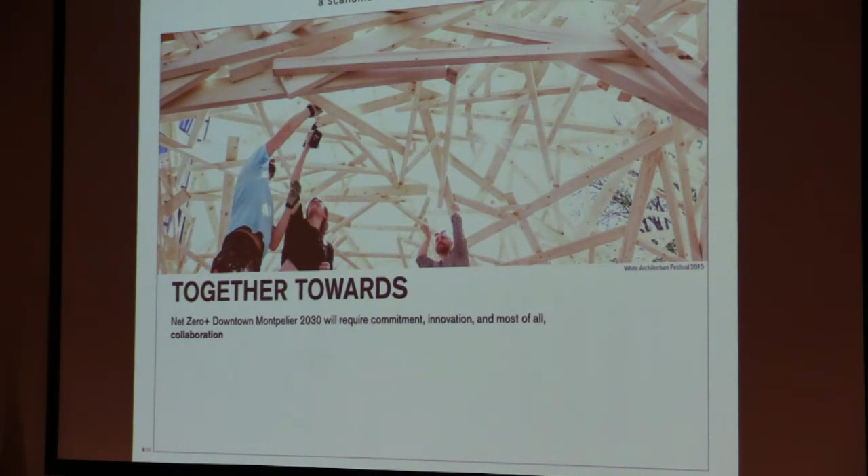Next slide. Creating a healthy city that ensures human well-being requires commitment, innovation, and most of all collaboration. We would like to collaborate with you, to guide the community to success. Therefore we offer a strategy, not necessarily a design. So you should read our proposal today as an architectural illustration of the possibilities and opportunities, meant to invite and inspire you to participate in the design process.

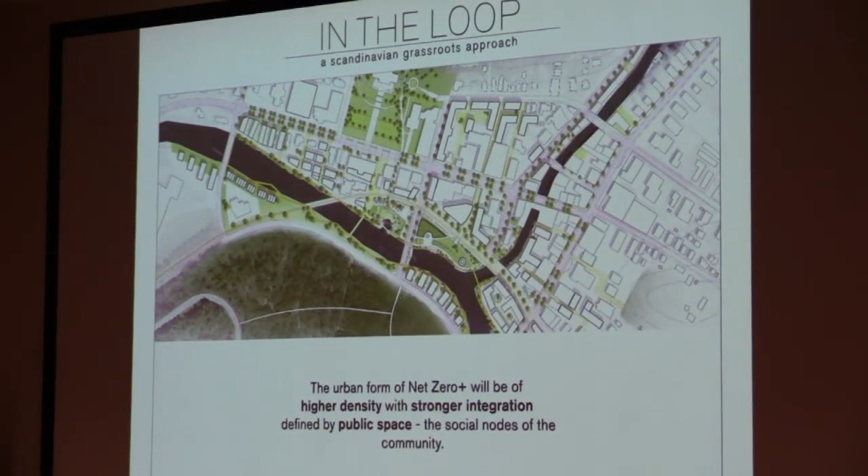Next slide. A net zero or net zero plus urban environment requires higher density with stronger integration of elements. Our proposal is a toolbox, full of smart, innovative, and doable design solutions applicable across all borders—solutions that will ensure a healthy city. The new development is nested in harmony with the existing Montpelier, enhancing the existing community, and is a celebration and addition to a wonderful city, offering new developments that will attract the young.

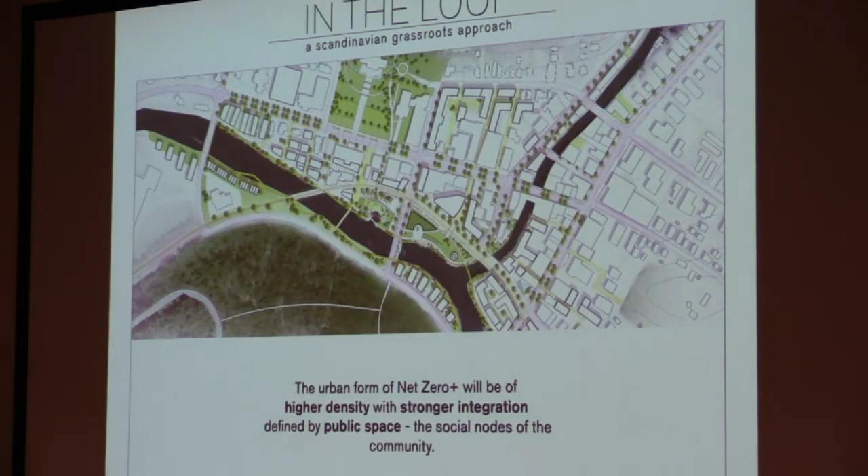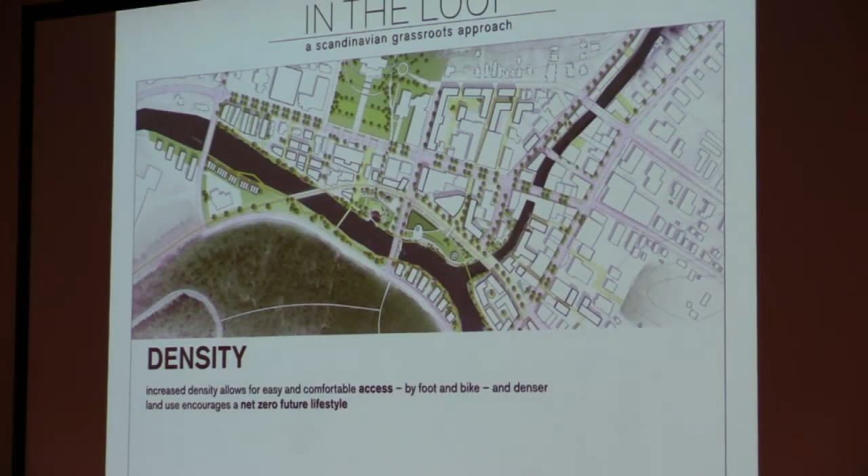Next slide, number 6. An increased density is essential for a net zero urban environment. It makes for close proximity, which allows for more sustainable transportation, more sustainable operations, more sustainable energy use, but also a more sustainable lifestyle—because keep in mind a sustainable future is not only about energy saving.

Next slide. A higher density, together with strong integration of functions and program, creates a healthy city. Our proposal includes a series of doable, innovative design solutions that are adaptive or adaptable to future changes, aiming to empower people to take a lead role in everyday life. Next slide, number 8.

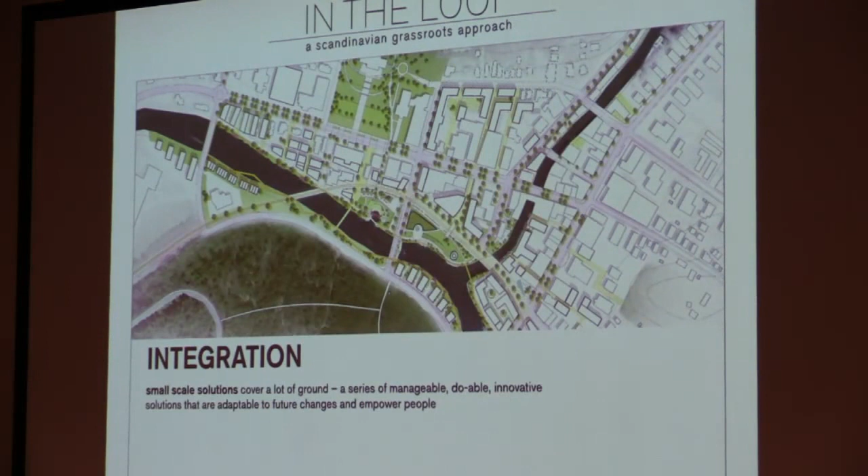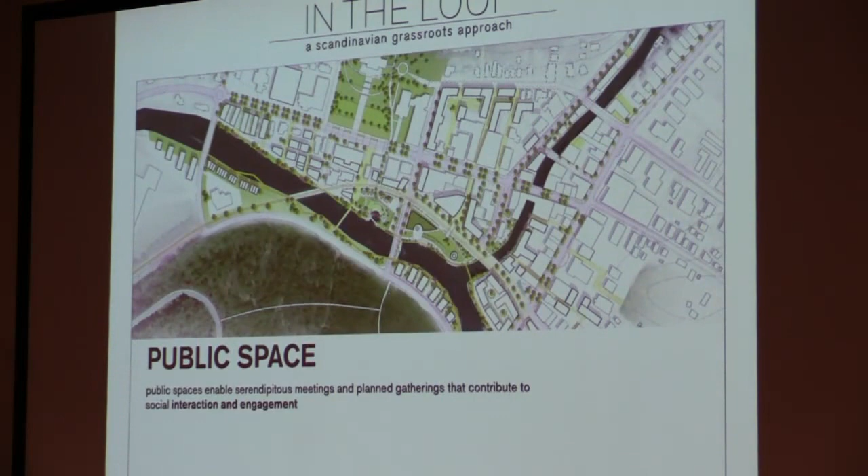Public space is the backbone of a healthy city, and we offer a wide variety of public space for the diversity that is the community, to contribute to social interaction and engagement, once again to ensure the community's well-being. Public space is a grand democratic gesture that empowers residents with pride, ownership, and accountability. Next slide.

At the center of the proposal is the new Winooski River Park, which is an essential public space in design that offers a dynamic program reconnecting Montpelier to the river. Winooski Park is an assemblage of park rooms that engage both the city fabric and the river. It's a green anchor, a welcoming entry, and the breathing room for the city development.

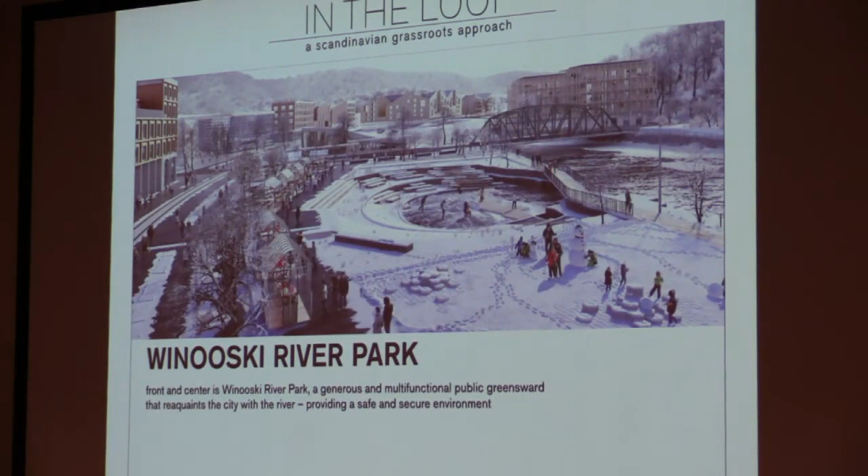In the middle of Winooski River Park, we envision as one of the first steps in the development the new Net Zero Plus Lab, which is a place where people gather, a space for education and engagement, and it focuses once again on the youth to take part in shaping the future of Montpelier.

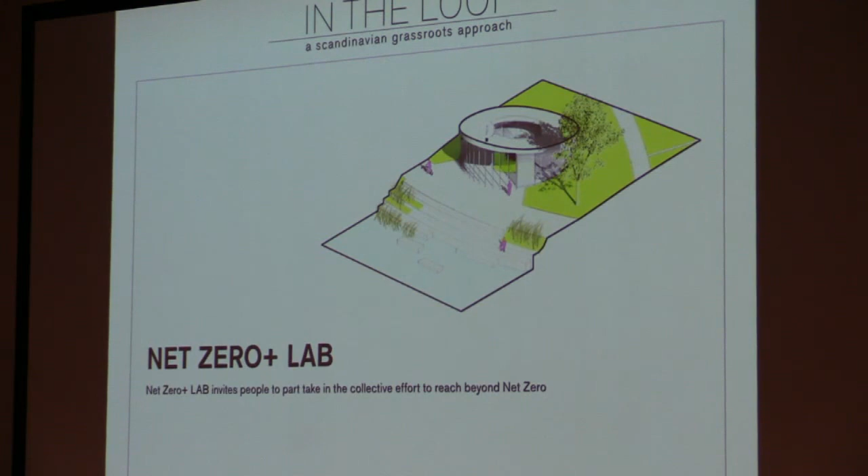And it can play a strong role in stormwater mitigation, because a net zero city requires that we double-purpose every civic infrastructure. An analysis of soil contamination is required to inform the design of this.

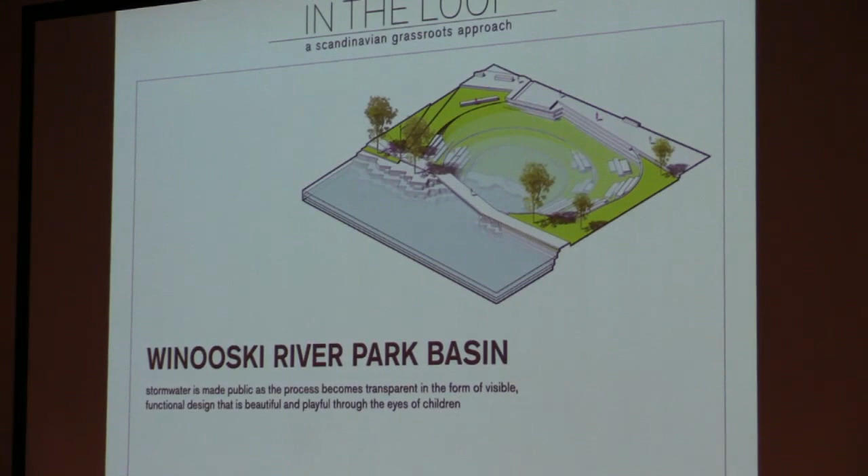Stormwater mitigation measures are very important for every city located along the river, now and even more so in the future. What we do is integrate it in the public space, where we can collect, filter, detain, and infiltrate stormwater while also celebrating water and public life.

This playfulness is celebrated in both large and small gestures throughout the city, on the street, in parks, and in the interface between public and private.

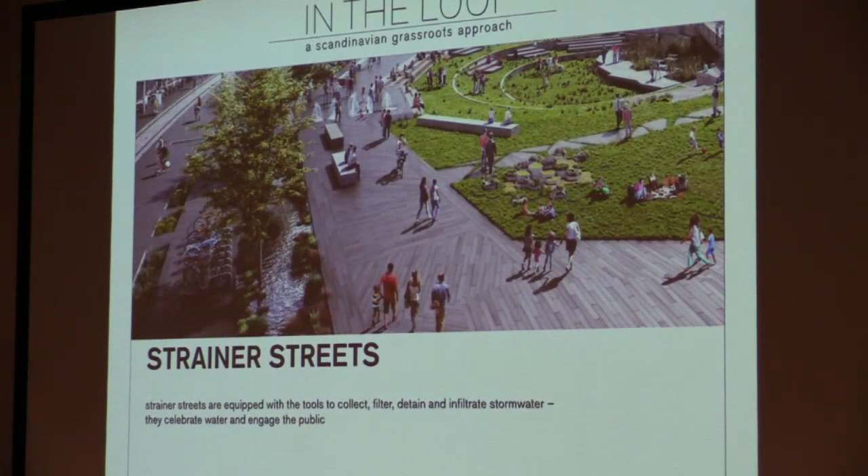A variety of public functions, such as the transit hub, will bring life to the park, ensuring an attractive and safe urban environment.

Certain transit hub activities can be placed on the streets. They don't need to be in indoor climate within the building. They can be on the streets, and they should focus on the transformation from car traffic to other means of transportation, such as bicycle rental, car share stations, and local electrical bus lines. By doing so, this activates Taylor Street and the civic landscape.

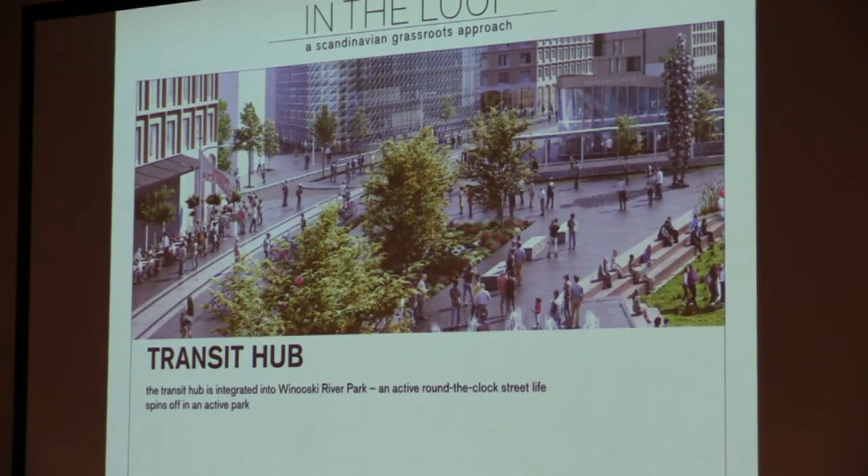The new development exists in harmony with the existing buildings of Montpelier. It's not meant to replace the other buildings, but it will have an integrity and character of its own. It's not a replica of decades past.

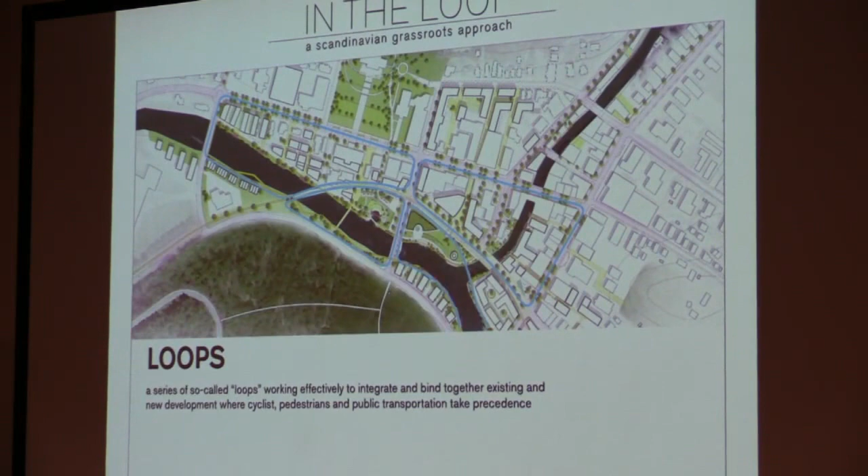A series of loops integrate the new development seamlessly and ensures easy accessibility for cyclists and pedestrians. These loops are easily expanded to serve additional neighborhoods to the east, west, north, and south.

In one of these loops, from the east to Winooski River Park south, the park extends very naturally on something we call the new Park Bridge, creating the new entrance to the city.

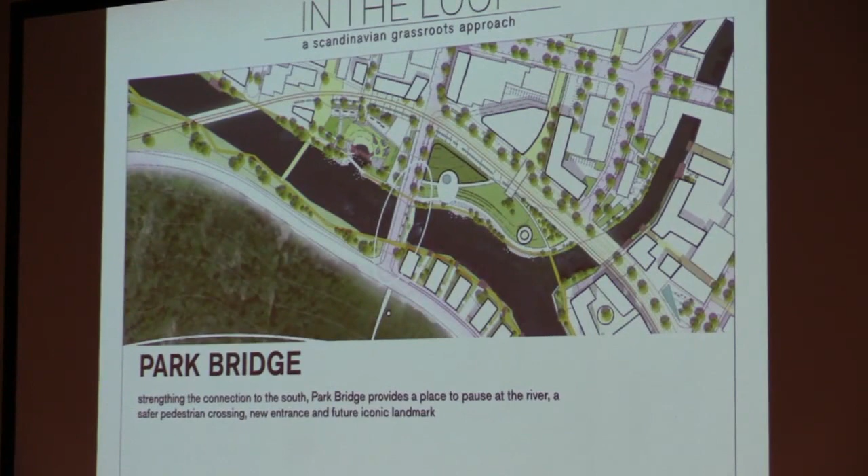This will transform the existing bridge to become a new icon for Montpelier and create an iconic entrance to the city and the transit center located in the city center.

The architecture: we aim to include the community to formulate the architecture of Montpelier and beyond.

The new development offers alternate and flexible typologies, providing opportunities for all, such as cooperative housing, low-income and market rate rentals, private residential, and commercial functions.

We envision that the architecture is constructed from locally sourced, sustainable, and recyclable materials where possible.

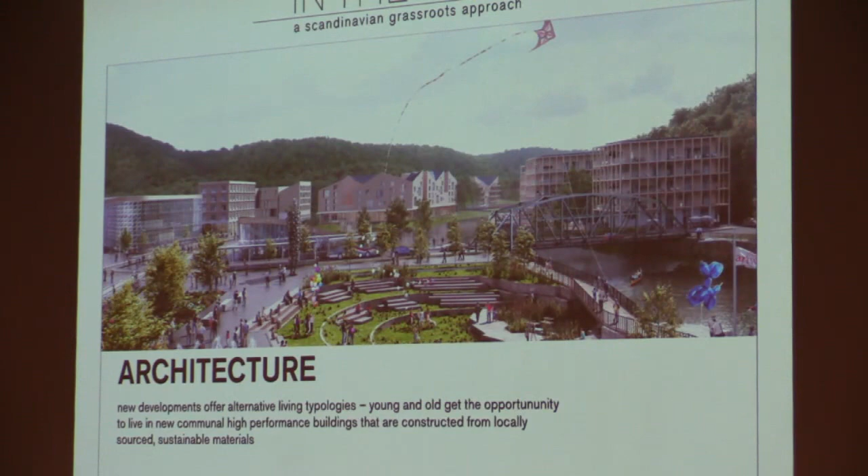A first step towards this future could be a hybrid parking garage on Main Street to make the existing parking space available for development.

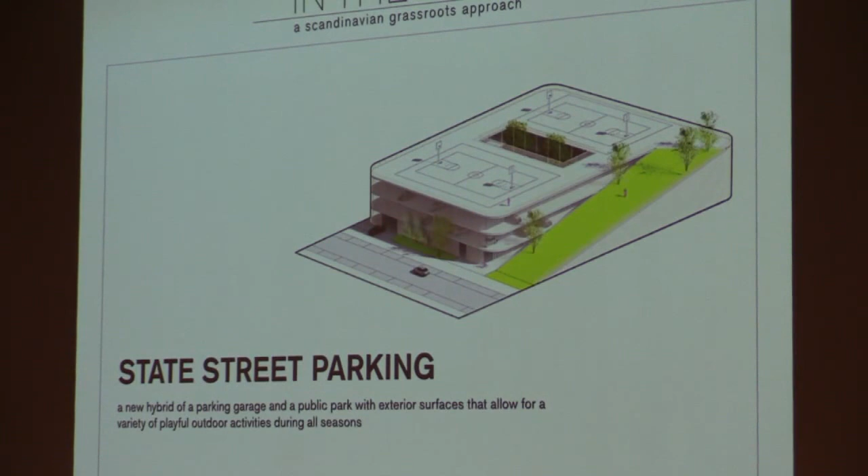The parking garage will include programs to activate the building, such as outdoor leisure on the roof. It can also include a mobility hub to transform once again from car traffic to more sustainable transportation measures. It can include a community center, and eventually housing could be included in the same structure.

Makerspace living is a new typology. It provides opportunities for young starters, both in starting their business and also in finding a new home. And it's adaptive to market demands.

It is built up of a rational structure with prefabricated elements that can transform a floor either into dwelling or makerspace spaces. It blends rental units, home ownership units, and mixed-use units.

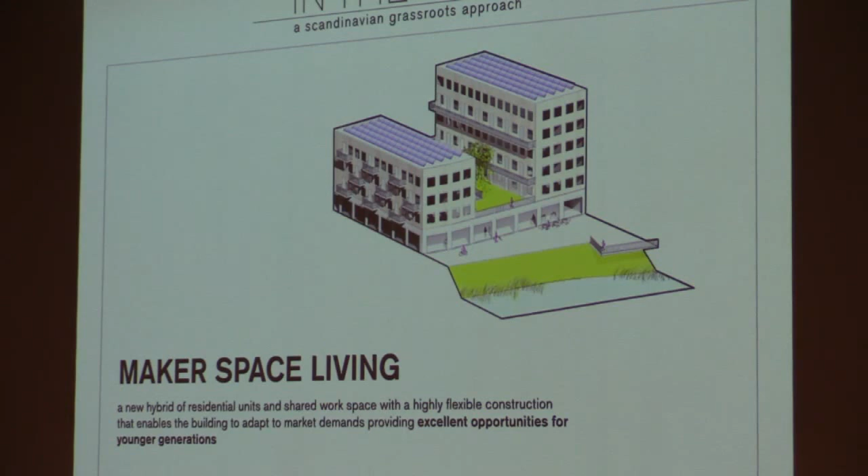The new indoor farmers market is inspired by the existing farmer market culture in Montpelier, and it aims to connect from farm to fork.

The farmer market links to the included functions, which are elderly housing and daycare, through educational purposes and daily activity. It is bridging generations.

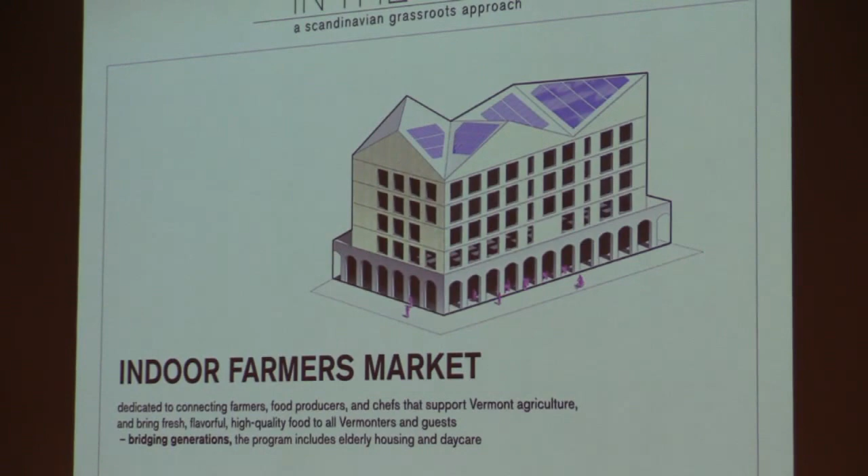And it is providing for hands-on learning to build an understanding of nature and its importance for a net zero plus future. It allows for locally produced food production to supply the culinary industry.

Once again, another loop in our proposal.

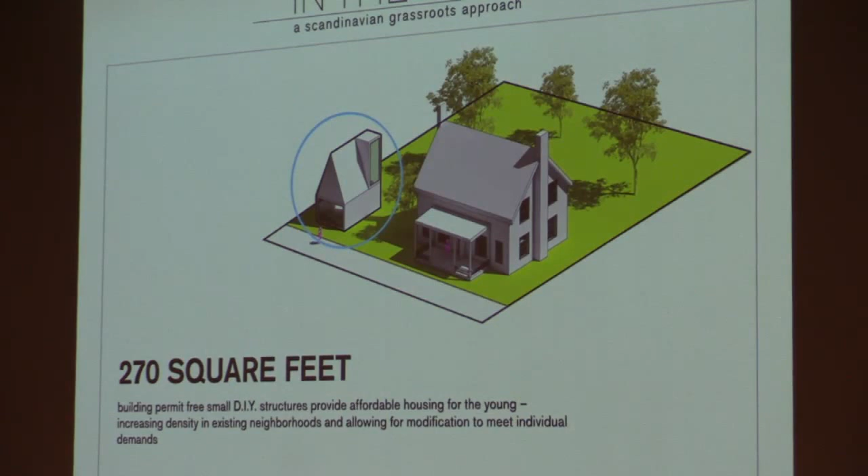We suggest the city allow for the construction of structures less than 270 square feet, similar to the model we have here in Stockholm, without a building permit. This provides even more affordable opportunities for home ownership for young people. I have to add that this is not required to achieve the required density downtown, but it will densify areas further away from downtown, and most of all, provide opportunities for the young.

On the south side of the river, we envision a series of housing units called river housing. The development of the south bank is essential to connect downtown to the insurance company in combination with the new bridge park. Being close to the river, the buildings will have a concrete plinth supporting and protecting from possible flooding, with a timber construction on top for the upper floors.

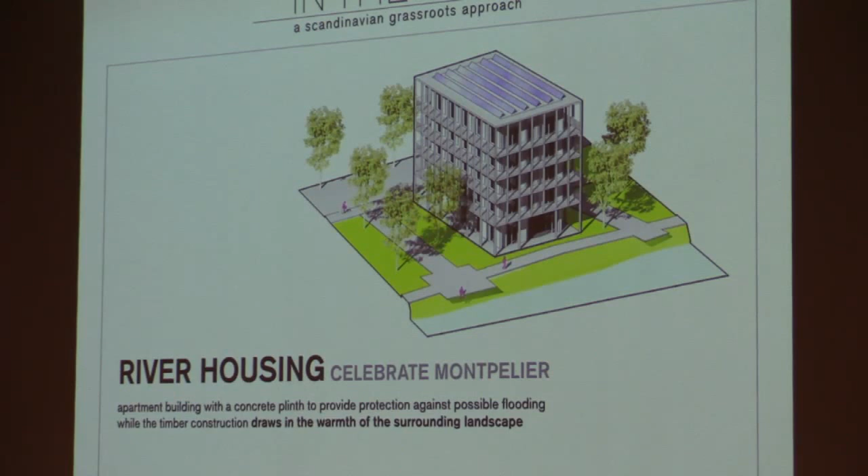The architecture of all buildings and public space is based on the items from our first part of the proposal. The first being to engage the community in public life. This can be done within the architecture by opening a program on the ground floor, which will activate and secure the place and the space around the buildings.

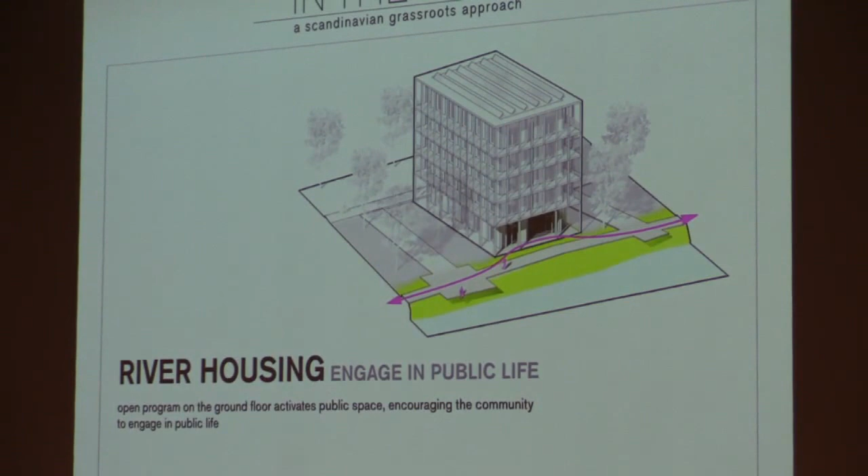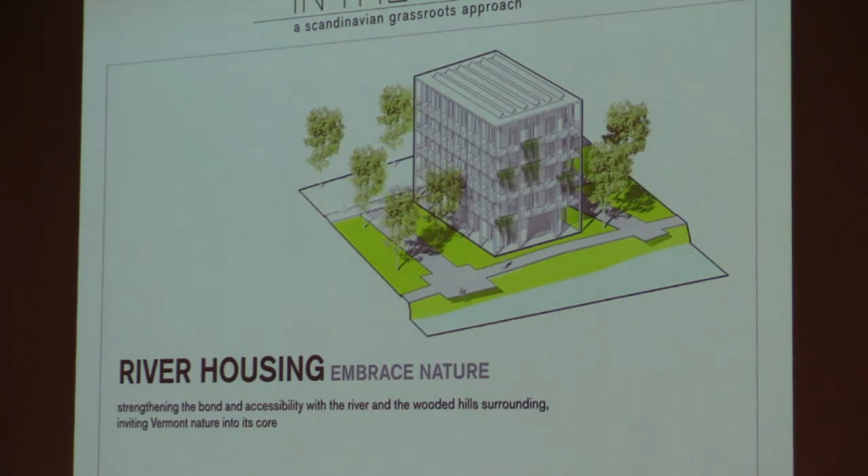The architecture and the urban scheme will also embrace nature through materialization, introducing and integrating green into its architecture. It will support stormwater mitigation, building performance, moisture regulation, cooling and insulation of the building, as well as sunshade, in a very natural and cost-effective manner.

All buildings and the design will ensure energy saving through efficient district heating and natural ventilation, and energy generation through integrated solar cells within the architecture.

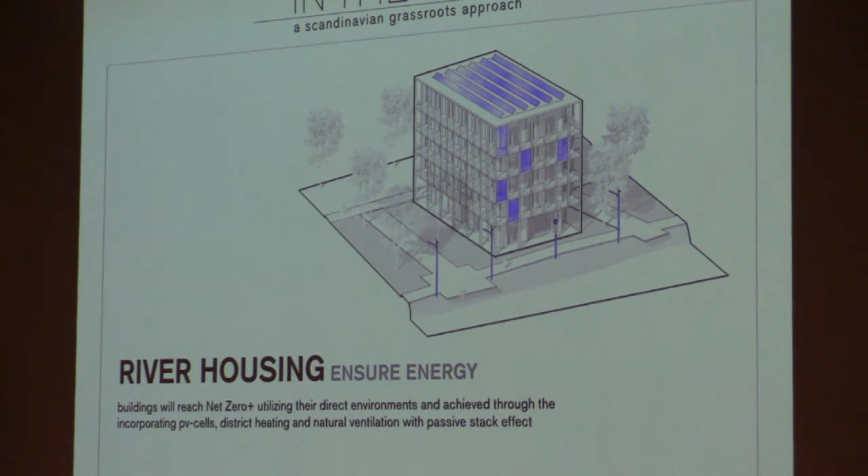To achieve a net zero plus, the design includes a variety of technologies and policies, which is really important. The technologies vary from district heating, solar panel roofs and facades, turbines in the river where possible, solar and wind powered systems, and smart street lights. Smart street lights will react to the amount of natural light available as well as to traffic intensity. We estimate that 50% of the required energy can be generated within the city.

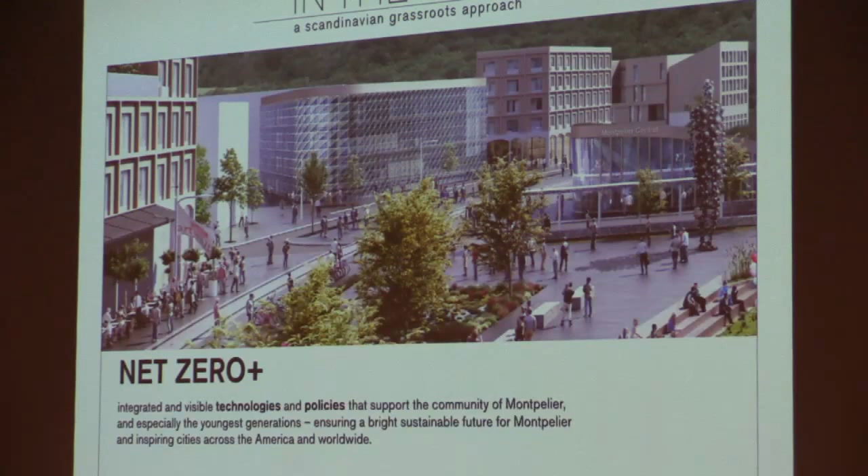The proposal also includes a series of policies the city can adapt to ensure a net zero future. This can be building permit prerequisites that ensure a building's performance and renewable energy use. It can be long-term contracts with energy suppliers, funding for sustainable initiatives, or tax reduction for sustainable initiatives.

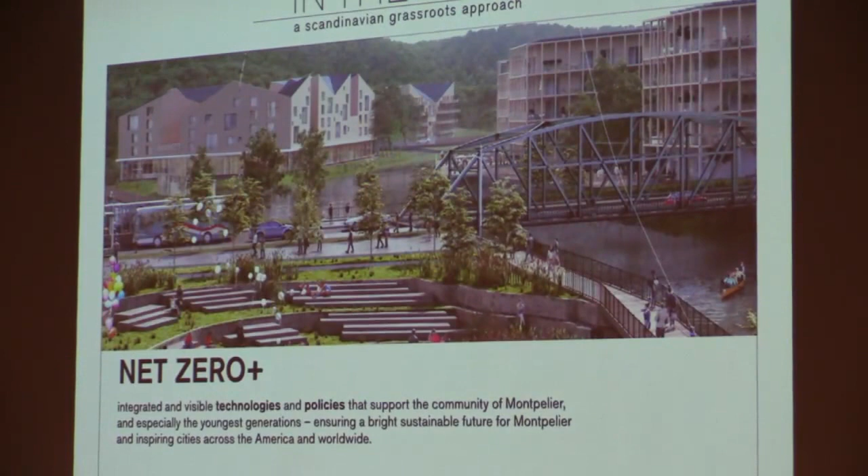But most of all, a net zero plus Montpelier requires you, the community of Montpelier, to get into the loop with us and make this the future you want for your city. Thank you.